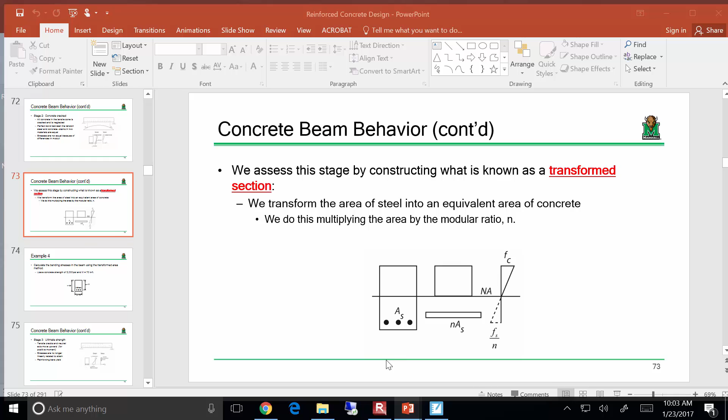So real quick, we've been talking about the concept of beam behavior. In other words, as we start to increase load, how does the beam respond?

All right, let's get back to this. So we started off talking about low levels of loading, and we broached the concept of a cracking moment. The idea that under low levels of load, the beam responds like any other, but because concrete is a material that behaves weakly in tension, there's a point when the concrete just gives up and the steel takes over, and that's the cracking moment.

Now, I think maybe there was a little bit of confusion about, well, if the concrete cracks, how does it grip onto the rebar? Well, hopefully I've got a little video here that might help explain what's going on.

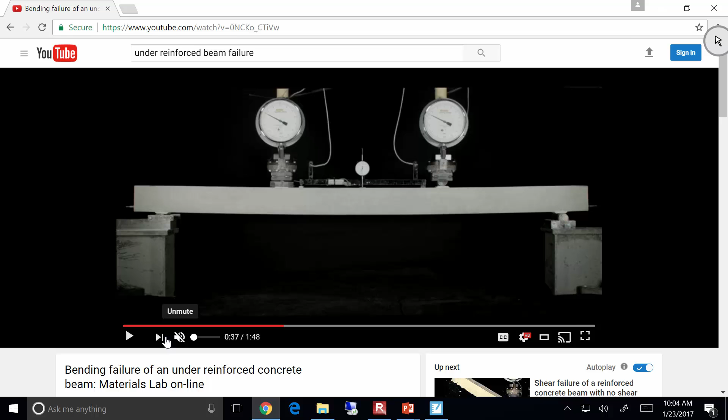So I've got here a reinforced concrete beam test. Now, you'll notice the video states that this is a bending failure right there. On the video, the title lists the bending failure of an under-reinforced beam. That might not make a lot of sense right now, but it will later, because there are differences in the ratio of reinforcement that can go in concrete beams, and there's a very big difference between the failure of what we'll call an under-reinforced beam and an over-reinforced beam.

We'll get into that later when we start broaching topics of design. But I want to be clear what happens during the bending process. Now, I've got this beam and I'm applying load, and you can see the dials are cranking up, and you can see the loading is applied.

Now let's be clear. At this point, we've already broached the cracking moment because it might be a little hard to see, but you can see the cracks are forming, right here and here. We've already hit the cracking moment because it's cracked.

That doesn't mean the beam can stop taking load. That just means the steel starts to take over. Our bending cracking is occurring right here, but there's still concrete over here that's gripping onto the rebar and it's doing just fine. So the steel can take over because the rest of the beam is still gripping that rebar, which brings up another topic we'll talk about later: the concept of development length. It's the idea of how far a particular piece of rebar needs to be embedded into concrete in order to develop its full capacity. That's a whole can of worms we'll talk about later.

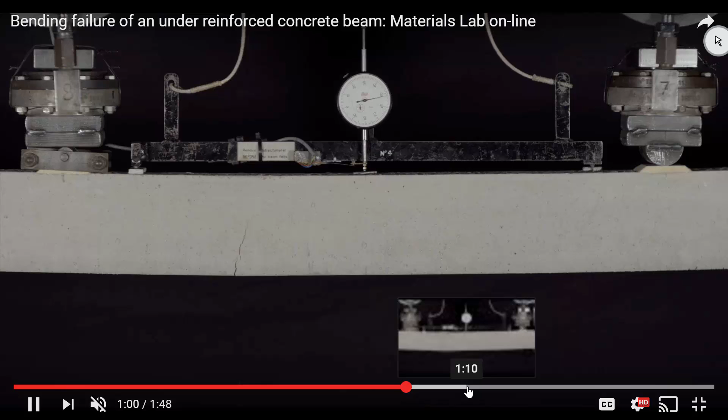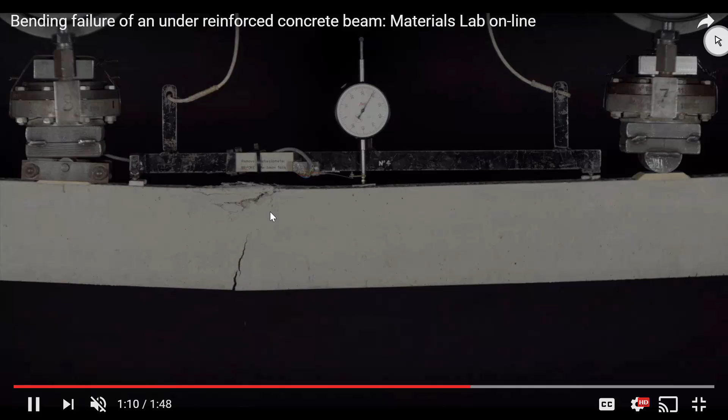But does this kind of make sense? Keep in mind, the beam has undergone its cracking moment, but you can see it's still accepting load. Now you can see it's starting to give up and it's kind of softening. You can see it reached its nominal capacity. This is them zooming in on it a little bit, and you can see cracks are forming, and it's still accepting load. You can see there it goes, and then when you start to reach the compressive crushing stresses right here, that's when the beam basically kind of gives up. When the concrete in compression gives up, it's done.

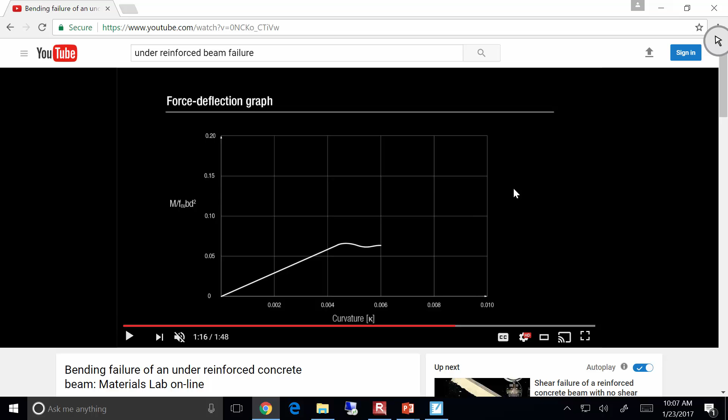So far, so good? Any questions? All right, now just because I like showing these videos...

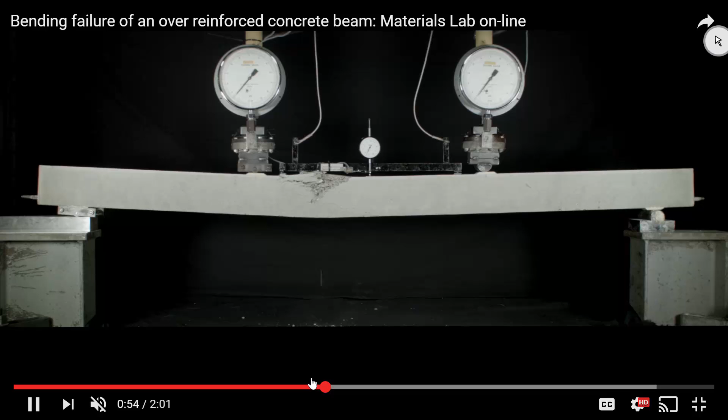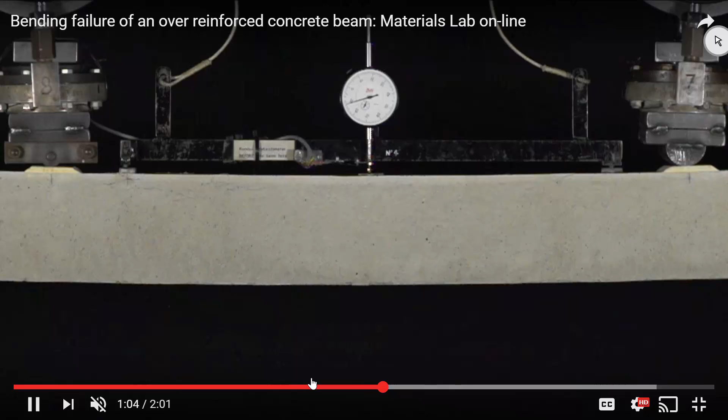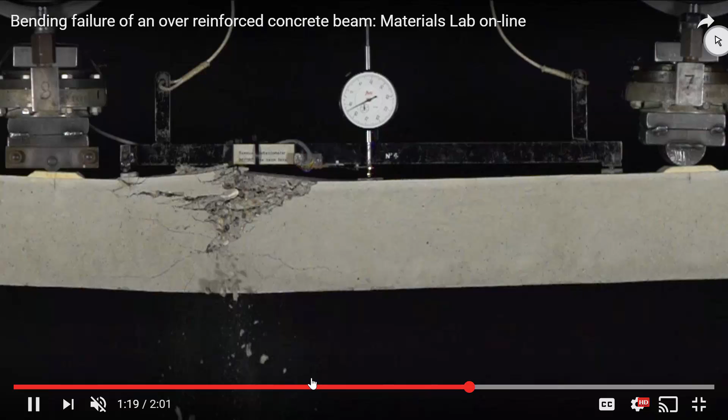This is an over-reinforced beam, and you'll notice the behavior is quite different. The difference is this is a concrete beam as usual, only instead we threw more rebar into it. And when you throw more rebar, you'd think that'd be safer. Not necessarily, because we have to obey this thing called equilibrium, and equilibrium states that the compression has to equal the tension. So if you throw a bunch of rebar into it, you're demanding more compression from the concrete all at once, so when it goes, it goes quick. So that's an over-reinforced failure. So sometimes throwing a whole bunch of rebar into it is not necessarily the right answer. It's just something to think about for later.

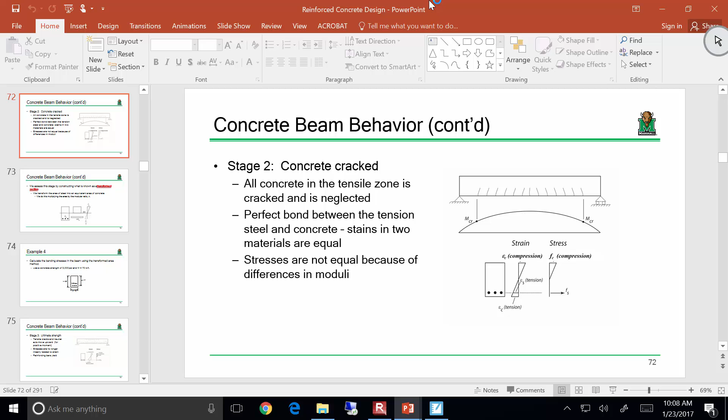Let me say that. Okay, you're raising a good point. So in the world of beam behavior, we have three regions that we define.

We have regions that are tension controlled, meaning it's largely governed by its behavior in tension. We have compression controlled regions, and then we have a transition region. When we're in beam design, we want our beams to be tension controlled. In other words, we want the steel to yield before the concrete crushes, because in that instance we have presence of large deformations, and we get a little bit of quote-unquote warning that the beam is going to fail. If it's governed by compression-controlled behavior, when it goes, it goes quick, and that's something we don't want to happen. So does that make sense? But to succinctly respond to your question, what I would say is just right is under-reinforced. That's just right. Does that make sense? We'll get into this later.

Yes, sir? Are you talking about like fiber reinforced mix or fiber reinforced bars?

Yeah, I mean, there are other grades of concrete. I do a fair amount of research with a material called ultra high performance concrete, and it's basically a particular type of mix where essentially steel fibers are thrown into the mix, and you can get some compressive stresses that are like 20,000 psi easy. The problem is it's expensive, so you can only use it in appropriate details. But yeah, they do that, and it's just going to change your FC prime, and it may change your behavior a little bit. But once you start getting into that, you start getting into more advanced topics in concrete design, and right now I'm just trying to focus on basic stuff. So I want you to be able to handle normal, regular old concrete before you can handle all the fancy stuff. So, sound good? Okay.

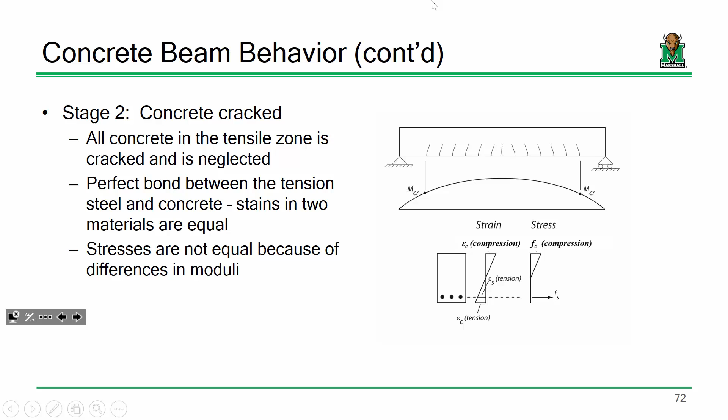So let's say that the beam has cracked. Let's say we have broached the cracking moment. So that means essentially the steel is starting to take over. Now, in our analysis, what we do to be conservative is we say that any concrete that's in tension, we just assume that concrete to be ineffective.

So if we samurai sword or lightsaber through the cross-section, we end up getting something that looks about like this. Let me draw this over here on the side.

So we have the neutral axis right here. We have the concrete above that's in compression.

And in tension, all we have is the rebar. I'm not saying there's not concrete there, I'm just saying we're assuming it to be ineffective. It's not really doing us any good. So if you want, you can think, yeah, there's a beam down there, but we're just not considering it.

Now here's the problem with that. The problem is that I now have a cross-section that's got two materials in it. So if I samurai sword through the beam, I've got part of it made out of concrete and part of it made out of steel.

The problem with that is if I start breaking out mechanics of materials or deformable bodies, if I start breaking out sigma equals My over I, the problem is that sigma equals My over I becomes invalid when you have a beam that's made of multiple materials.

It doesn't work. Sigma equals My over I assumes that your beam is made out of wood or aluminum or copper, not out of concrete and steel. It doesn't work. So what we're going to do is this.

We're going to, quote unquote, transform this lump of steel into an equivalent lump of concrete. So our cross-section is really going to look like this.

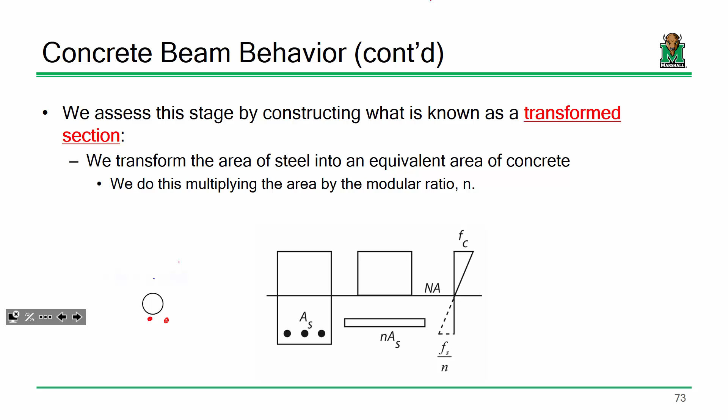If that's the case, then I want to go into the following example, okay? Now, I want to calculate the bending stresses in this beam using the transformed area method. So we're going to assume that this beam is being subjected to a bending moment of 70 foot kips.

We're using a concrete strength of 3,000 psi. I want to determine the stresses.

Now, a couple things I'll point out. I'm being very choosy when I use my symbols. For instance, B, I'm saying, is the width of the beam. Okay, D — now this is a D, we're going to use D quite a bit throughout this semester, so this is something you'll want to pay attention to.

Notice how D is the distance from the top of the beam down to the center of the rebar. It's not the height of the beam. It's the depth from the top to the rebar.

By and large, when we do our design calcs later on, we're not going to really care that the beam is 20 inches tall. We're going to care more about the distance from the top of the beam to the rebar. That's going to matter more to us than the height. But we'll get into that later. So far, so good? Okay.

Now, we do need the height, however, to determine the gross moment of inertia, because what I want to know is this: we're calculating the bending stresses using the transformed area method, or transformed section method — it's the same thing. That assumes that the beam has already cracked.

So I want to see what is the cracking moment of this beam, and have we already reached it. So let's just sort of play around with that and see what we get.

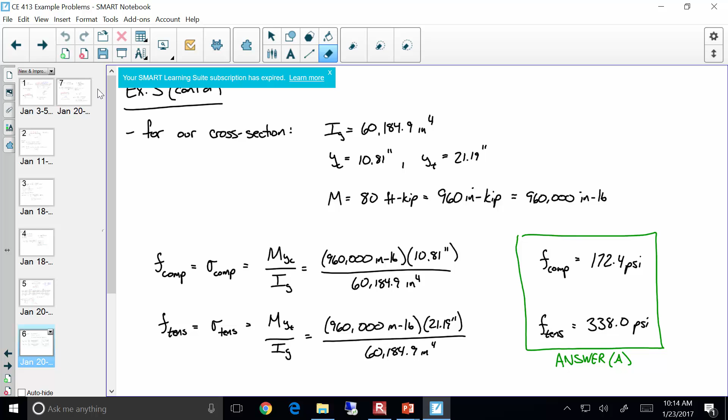Okay, all right, so let's play around with this. Let's see what we got going on. Okay, so let's start off by determining the cracking moment.

Now, by now, you should have enough experience with the examples that we've done to determine this. So let's do this: to determine the cracking moment, we're going to need some values. Somebody start spitting out some values, and let's see how we discuss them. So what's a value we're going to need to determine cracking moment?

The modulus of rupture, F sub r. So how do we compute F sub r?

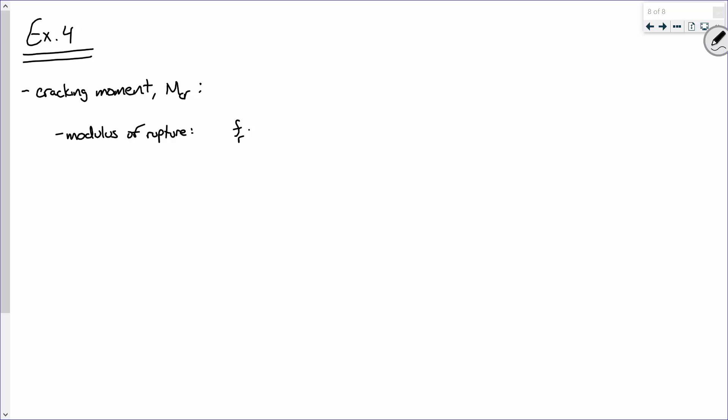So F sub r equals 7.5 lambda square root of F C prime. Okay, let's start plugging in some values.

We'll assume this is normal weight concrete, so what's lambda? 1. And what do we do for FC prime? Square root of what? There we go, 3,000 psi. We plug in psi, we get out psi. So what is that?

When you see a square root of FC prime, that's a good question. Put in psi and you get out psi. If you put in ksi, you could say you'll get out ksi, but I'm telling you the answer will be wrong. And you could test that.

Well, we could test that here. First off, give me this. What do we have here? 410.8 psi. Okay, so do this: 3,000 psi equals how many ksi? 3. So do 7.5 times the square root of 3 and tell me what you get. You don't get 0.4108, right?

Okay, so yeah, always put in psi and get out psi. That's a good question, and unfortunately, it's very easy to test. So, sound good? All right, what else are we going to need to compute the cracking moment?

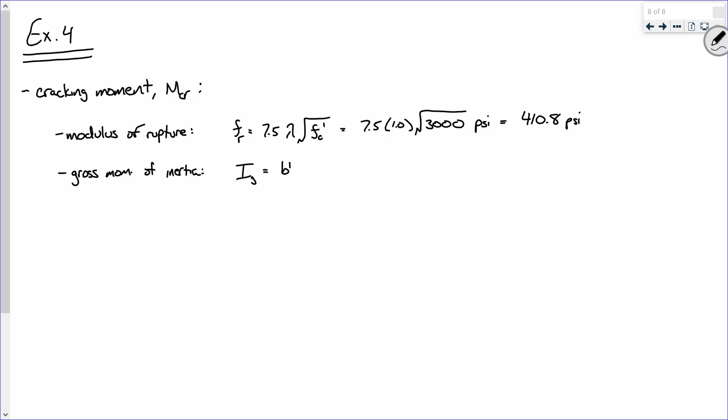Moment of inertia, or gross moment of inertia. So how do we compute the gross moment of inertia? The b h cubed over 12. So what is that? Tell me what to do. What's b? And what's h?

For now, we're looking at the whole beam as if it was one cohesive material, so we'll use 20. I'm saying later on, like in a few weeks, the h isn't really going to matter to us. Right now, for this calc, it does. So what is this? Say it again. 8,000. 8,000 what? There we go, inches to the 4th.

We're also going to need y sub t. That's the distance from the centroid to the extreme tensile fiber. Remember, either the very top, or in this case, because we're looking at tension, the very bottom of the section. So how far is it from the centroid to the very bottom? 10 inches, right?

All right, sound good? Okay, so if I've got all this, how do I compute the cracking moment? What do I do? Plug and chug. And what's the formula?

There you go. So therefore, cracking moment equals FR times IG over YT. So what's that come out to be? It'll be a pretty big number, and that's fine.

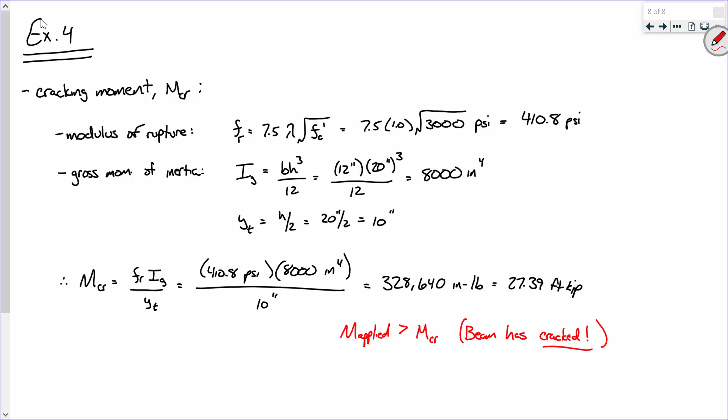Okay, so in order to handle this, we're going to need some values, a couple things. So we need to do a transformed section analysis. We're going to need a few values. I'm going to walk you all through this. So the first thing we're going to need is a modular ratio.

Now a modular ratio, the denotation for that is a little n. Okay? Now to calculate the modular ratio, we're going to need two things: the modulus of elasticity of steel, E sub s, and the modulus of elasticity of concrete.

Now first off, the modulus of elasticity of steel is a constant. Remember what that is? 29,000 what? KSI. Okay, so if it's hard to remember what E sub s is, you could put E sub steel. That helps. And that's 29,000 KSI.

Now, that's for steel. What about for concrete? For concrete, we're going to have to compute that. So you all are going to have to dig back through your notes. It's in there somewhere. Tell me, how do we compute the modulus of elasticity of concrete? It's in there. Make you all do some research, going back through your notes. It's like I'm trying to get you all to learn something. It's crazy, I know.

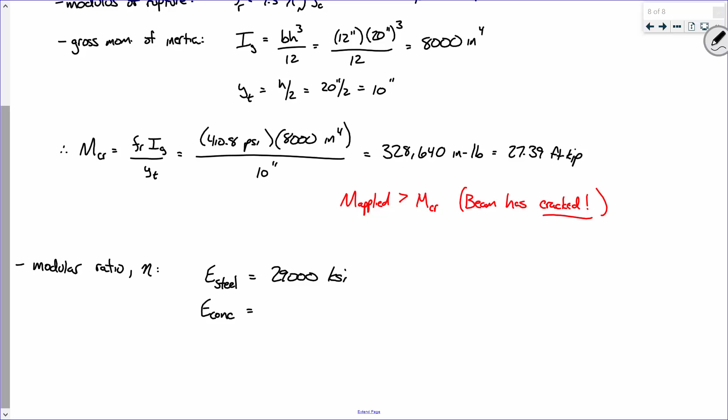There we go, 57,000. Does everybody see that? So 57,000 times the square root of f'c prime. For most cases, that's going to be good enough for government work. So 57,000 times the square root of f'c prime.

Okay, tell me what to do. What do I plug in? You plug in the f'c prime. And what is the f'c prime? There we go. This is my point: 3,000.

57,000 times the square root of 3,000. Now what units is that going to give me? PSI, there we go. So plug that in and tell me what you get. 3,122,000. 3,122,000 what? PSI. Okay, now that's PSI.

What's the problem with that? It needs to be KSI. So how do I do that? Take 1,000 off of it. So if I want, I could say 3122.02. That's good enough. Actually, you could probably just do 3122 and that'd be fine.

Sound good? To calculate the modular ratio, we're going to take E steel divided by E concrete. So 29,000 KSI over 3122.02 KSI. The decimals really aren't going to matter.

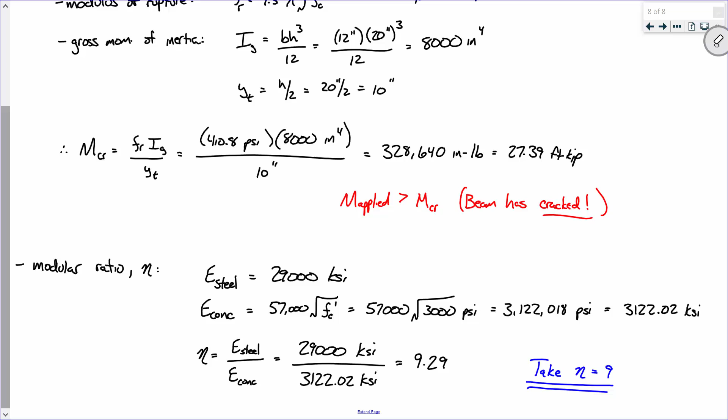Hope you all remember how to solve quadratic equations. It's on the Casio. Oh, it's there. Hit mode, number 5, and then number 3.

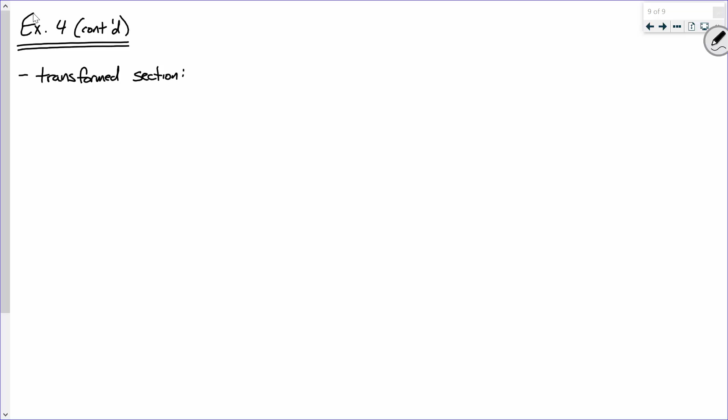Okay, transformed section. So we've got an n value of 9, and we also are going to need the area of steel. Now tell me a little bit about the steel in this section. What reinforcement are we using? Three number 9s, right? So going back into your notes, what's the area of one number 9?

No, I know you're thinking that you always take the value and divide it by 8, but that only works up until a number 8 bar. Number 9s are unique: 1 square inch.

Now what slide are you finding that on? 63. If you go to slide 63, you'll see the areas of conventional bars. Remember, I told y'all that's one you really need to put a bunch of stars on. The area of a single number 9 is 1 square inch.

So 3 number 9s, that's 3 square inches, and I'll label it 3 number 9s. I know you're thinking it would just be 9/8, where the convention is to divide by 8, but that only works from a number 3 to a number 8. So if it's a number 5, it'd be 5 over 8 — but that's just the diameter, not the area. To calculate the area, you'd have to use pi over 4 times d squared.

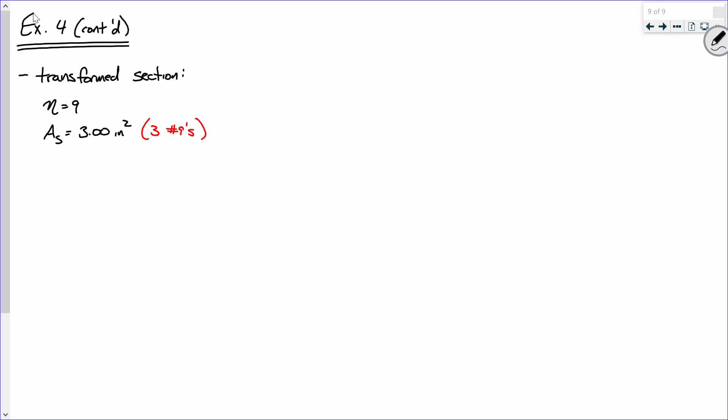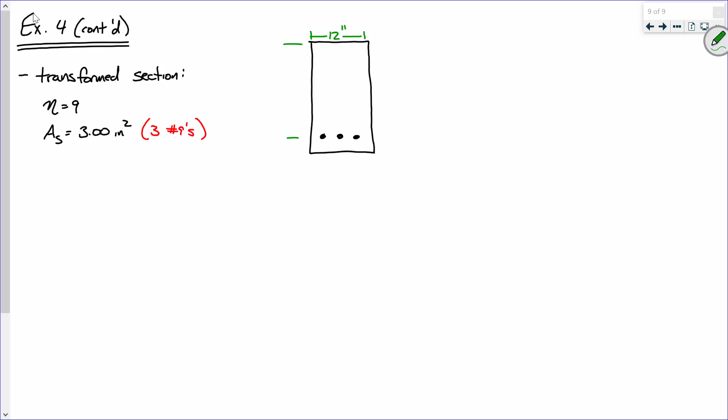Sound good? Okay, now here's what's going on in our cross section. So we have a beam that looks something like this. This is 12 inches, and we have 3 number 9s. And this is 17 inches. Is that right?

Okay, now for a transformed section analysis, what we're going to do is this: remember, we assume that all the concrete above the neutral axis is effective, but everything below isn't. So this is still 12 inches.

But this distance right here, we don't know what that is, okay? Because the point is to try and figure that out. So because we don't know what it is, I'm going to use the basic mathematics convention and call that x. I don't know what that is, we're going to try and figure it out.

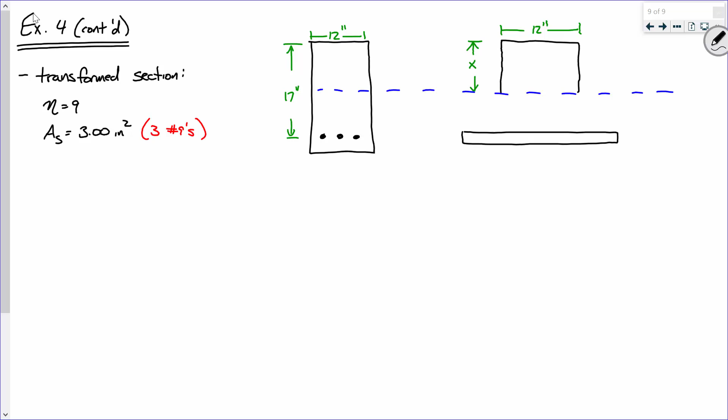Now down here, we're going to have this sort of lump of concrete right here, and that lump of concrete is going to kind of replicate what's going on with this steel. So this steel has some area, some 3 square inches. I propose that we have 3 square inches of steel, to develop that same amount of stress with concrete we're going to need a whole lot more concrete. Does that make sense? Concrete's a weaker material, so we're going to need more of it.

So I propose that the size of this lump is going to be nAs, which is going to be 27 square inches. That make sense? Everybody okay with that? Now let's get some dimensions taken care of.

Now the dimension from here to here, this is still 17 inches. We're still putting that effective lump of concrete where it needs to go, to simulate the effect of the steel. Okay, what I need to know is this.

Somebody tell me what is that dimension right there. Say it again. There you go: 17 minus x. Now, is everybody okay with that?

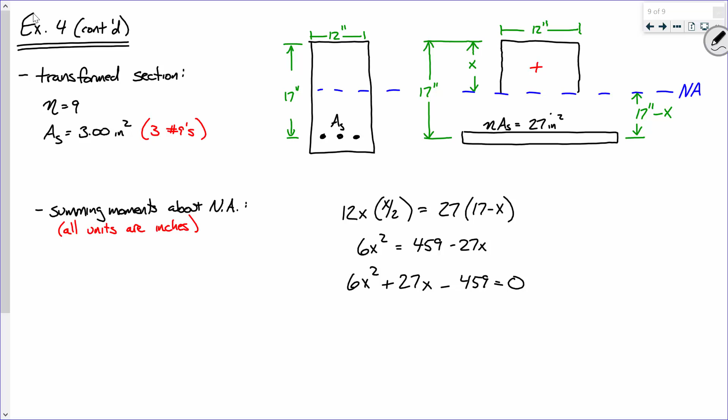Remember, it's mode 5, 3, and then you can just enter in your constants, and we should get two answers. 6.78 - we'll keep it to 3, we'll say 6.781. Is that right? Okay. And x sub 2 is what? -11.281. Okay, everybody getting that?

Now, which answer doesn't make any sense? The negative, right? We're talking about a distance, a distance measured down from the top of the beam. That negative obviously doesn't make any sense. And you'll either get one of two responses: you'll either get a negative answer, or you'll get some answer that's like 30 or something, that's greater than the depth of the whole beam. That doesn't really make any sense either. So that tends to happen on a lot of the calculations we perform, that you'll get two roots, and one of them just by observation ain't going to make any sense.

Okay, sound good? If you've got this, then you can go ahead and determine your transformed moment of inertia. And this is actually a pretty straightforward computation, very similar to what we did before with that T-beam. We're going to draw a similar table. So we'll say shape, and go to work. Although the nice thing about this calculation is, remember how we had like an A, and a Y, and AY, etc., and we had all of that?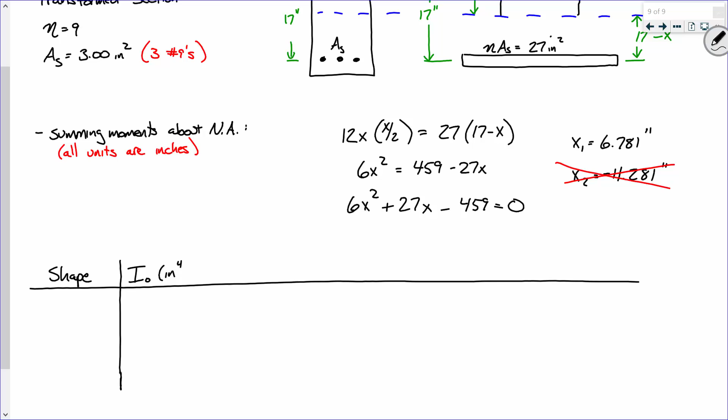We did the A and the Y and all that because we needed to determine where the centroid is. We don't need to determine where the centroid is because we know where it is. The centroid is 6.781 inches from the top. So our transformed section analysis is a lot easier. We're going to start off by calculating the moment of inertia, that's going to be pretty simple. Now for this cross section we've got two shapes, right, we've got the concrete and we got the steel. So let's start off with the concrete.

Okay, now this region of concrete above the neutral axis is a rectangle. So help me out, how do you compute the moment of inertia of a rectangle? BH cubed over 12. So I propose that to compute that for this particular rectangle, it's going to be

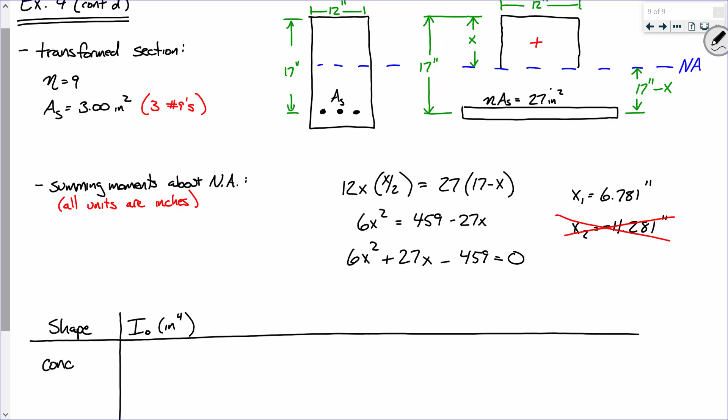12 times 6.781 cubed over 12, and that's going to equal what? Yes, that is correct. Say it again. 45.98. I got something a little different. 311.80. 0.8. Was it 0.83?

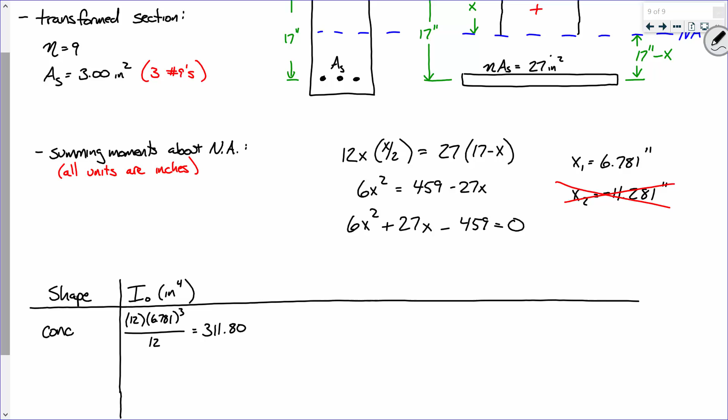I'm kidding. All right, I'm going to work on just the concrete, and then we'll go back to the steel. So here's the moment of inertia of the concrete.

Now we're going to need a couple things. We're going to need the area. How are we going to compute the area of that concrete region? Just 12 times 6.781, right? So 12 times 6.781, and that's what? 81.37. Okay.

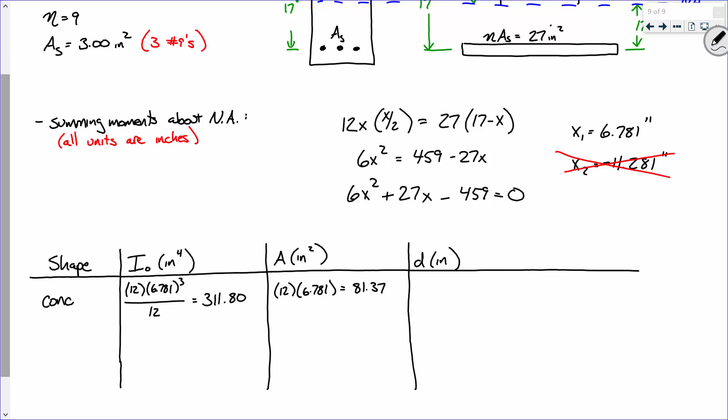Now, that's the moment of inertia. We got the area. We also need the distance for I plus AD squared. Now, the distance is how far it is from the neutral axis to the center of that rectangle. So how do we find that out? How do we go from the neutral axis to the center of that rectangle? There we go, 6.781 over 2. Now what's that? 3.39.

Sound good? So that's I plus AD squared. So tell me what you get for that first row. 12.36, you said? 1246.91, so 1246.9, something like that. We'll just keep it like that. Okay. Everybody okay with this? Now, that's the concrete.

Now let's look at the steel. Okay, now here's what might be a little strange. But what we're going to do is this. How would you compute, let's just conduct this as a thought experiment, how would you compute the moment of inertia of the steel? Looks like a rectangle, right? So BH cubed over 12, right? But how tall is it? Say again, you're right when you say that, not very.

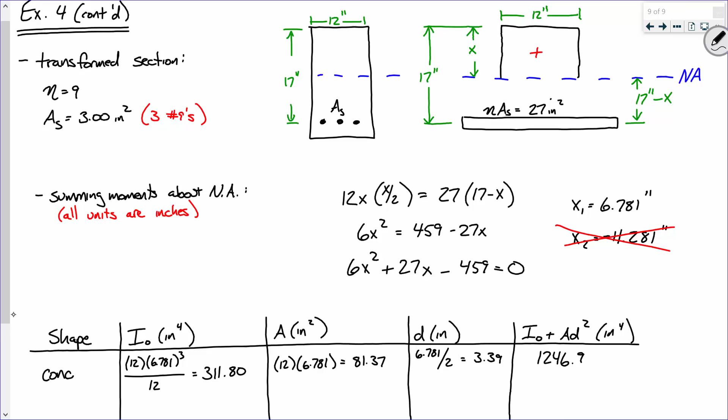What we're doing when we assume that, I used the word lump of concrete. That word was actually chosen very carefully. I'm essentially just lumping all of that area at one particular point, okay? So what I'm basically assuming is that I have an area, 27 square inch area, but it really doesn't have a height. It's just a lumped value right there. So what I'm getting at is that the moment of inertia, the individual contribution, or the I sub O for that given value, I'm just going to take that to be 0, okay? Because it's just a lumped value right at that point.

But you might be wondering, well, how does it contribute to the section? Well, it's not the I sub naught, it's the AD squared. What is the area of that steel going to be? 27. So it's going to be 3 times 9, which is 27.

Now, how far is it from the neutral axis to the steel? Say it again. 10.219 or 10.22. And you found that by saying 17 minus 6.781. And so that came out to be, just for purposes of calculation, 10.22.

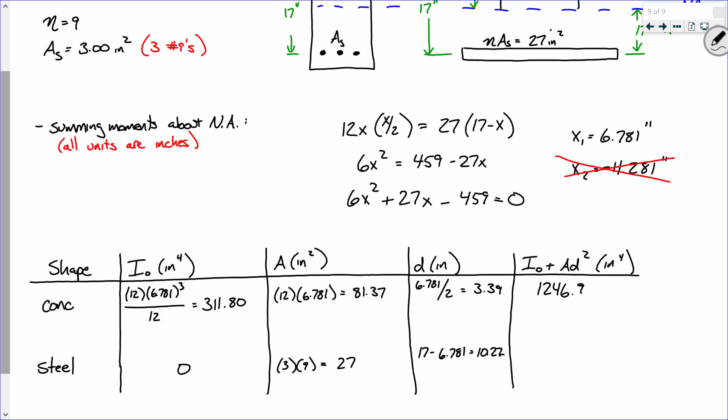Make sense? Now, tell me what I plus AD squared is. 2819.5? I'm easy to get along with, we'll just say it was the first one. Do I get a second on that? Okay, so sum those values up, and what do you get? Everybody get that?

Everybody good? So here's what I propose. I propose that the moment of inertia of the transformed section is 4066.4 inches to the fourth. Okay? Now let's talk about that value.

Does this value make sense? Think about it like this. What was the gross moment of inertia? 8,000. Okay? So let's think about what we're talking about here. We're talking about a beam that's already cracked, right? We're asking ourselves, how strong is this beam after it's cracked?

Now I propose that the moment of inertia is a measure of how stiff a section is under bending. Okay, that's what it is. That's why we use sigma equals My over I. Before the cracking moment, we had a moment of inertia of 8,000. After cracking, we have a moment of inertia of 4,066.4. Does that make sense? I think it's cracked, so now the beam got weaker. It didn't completely fail because the steel took over, but it is flexurally less stiff. All right? Does that make sense? Everybody okay with that? Okay.

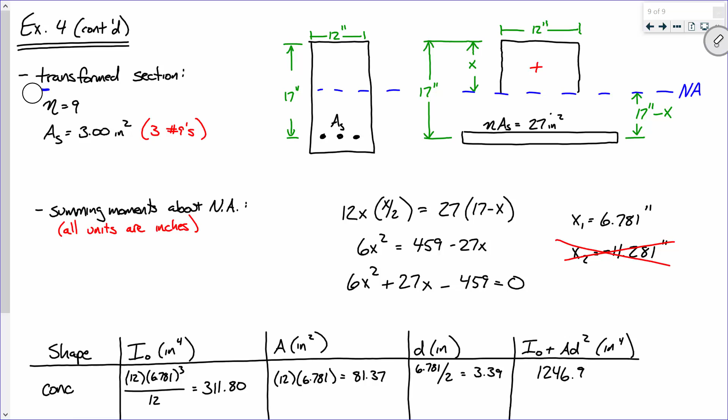All right, what is TR subscript? Transform, just this part right here. Transform. Sometimes it's referred to as I sub CR, just the cracked moment of inertia after it's cracked. So either one's fine. All right, sound good? Okay, now.

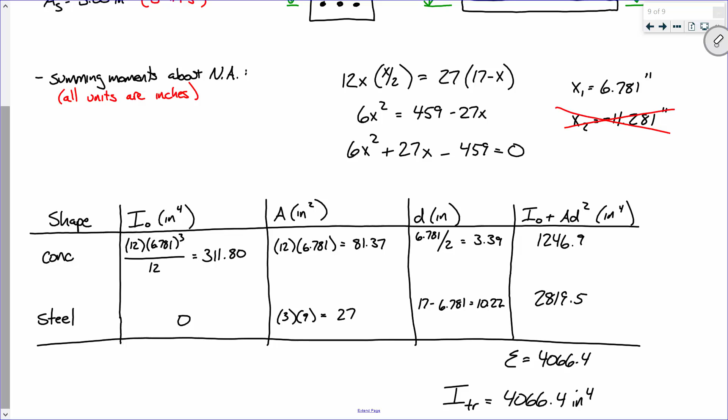Okay, the question, though, is we still need to compute our bending stresses. This is example 4. Okay, so we still need to compute our bending stresses. So let's look at this.

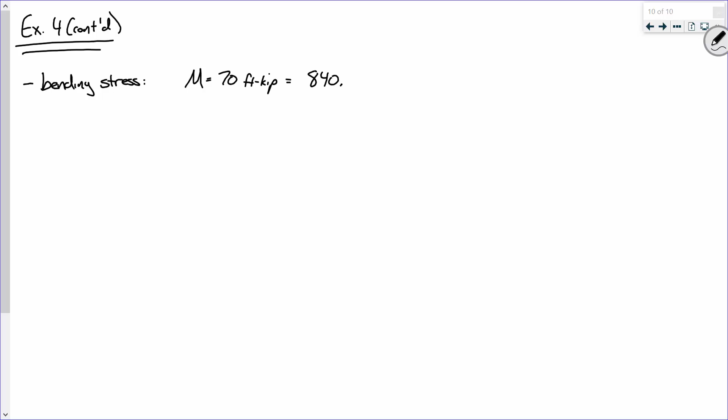So we have a moment of 70 foot-kips. Now, just for the heck of it, I'm going to have all my stresses reported in PSI terms. So how do I get this to inch-pounds? What was my little shortcut? Multiply by 12,000. So if I multiply by 12,000, that's 840,000 inch-pounds. Sound good?

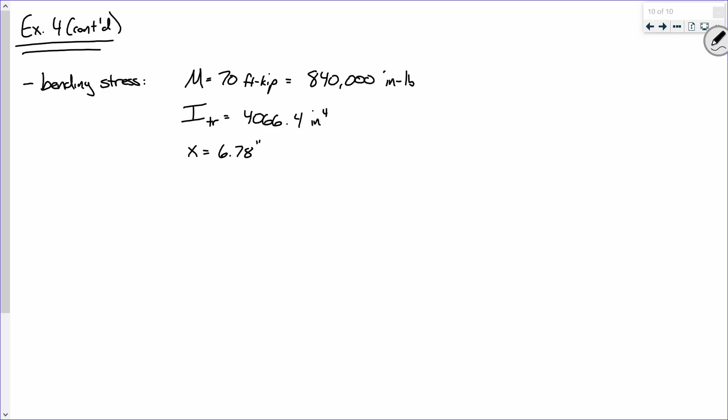Now we have a moment of inertia of 4,066.4 inches to the fourth. And we had an x value, I'm just going to keep it simple. It was 6.78. So we've got our beam that looks like this. We've got our lumped concrete. This is x, and this is 17 minus x. Make sense?

Okay, now let's start off with the compression region. So the compression region, we need sigma equals My over I. Remember, the y is the distance from the neutral axis to the way, way tippy top of the beam. So how far is it for compression from the neutral axis to the top? The x, yeah, 6.78. So the compressive stress,

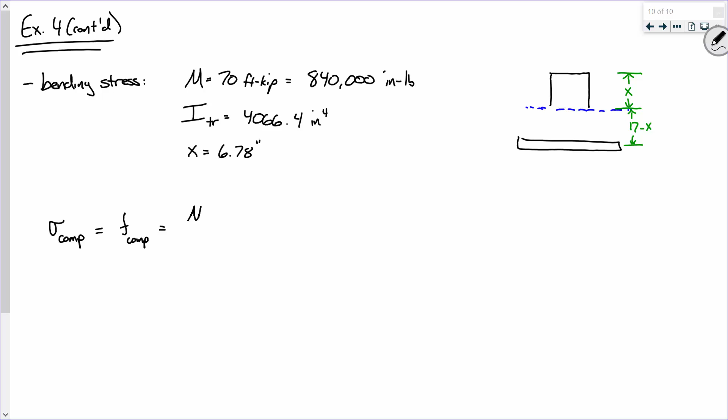Now for tension, we do the same thing, okay? We say My over I. Now what's our y going to be for the tensile region? 17 minus x. But here's the thing: if I were to just compute this directly, I would be reporting the stresses still assuming that it's a lump of concrete. But it's not, it's a lump of steel, okay? So I'm going to take those stresses and adjust them by n, okay? Because in actuality, the actual area is much smaller. So if you think stress equals P over A, the actual area is much smaller, so the stresses are going to go up. That's why we multiply by 9.

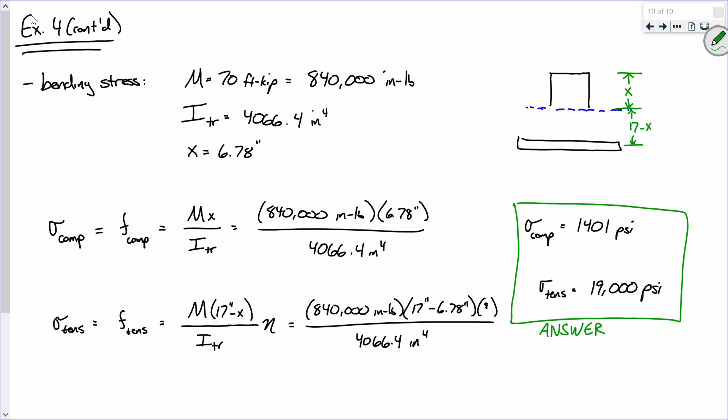Okay, now a couple things. Look at these values. These stresses are much larger than the stresses that we saw before, right? But they should still be well within what the materials can handle, right? What was the compressive strength of the concrete we used in this example? 3,000 psi, and that's 1,401. So we're getting there, but we're still not there. And steel, heck, steel usually goes for rebar for 60,000 psi. So we still got a ways to go. This isn't ultimate capacity, okay? Ultimate capacity does take a little bit of discussion.

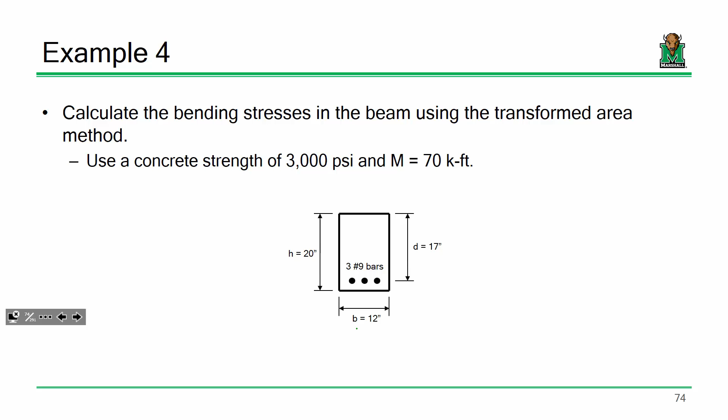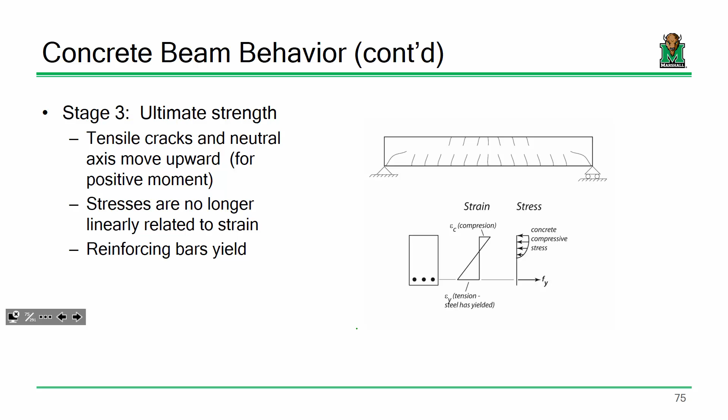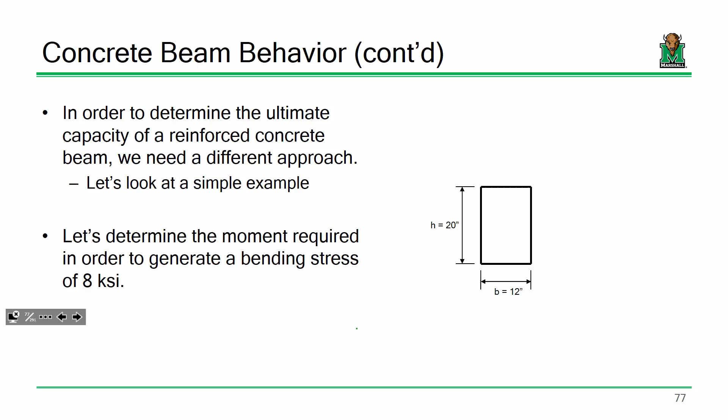Now, the complicated part regarding ultimate capacity is that your bending stress profile is not linear. It's nonlinear because your concrete is a nonlinear material. To explain that on Friday, I'm going to break out the C word, a little bit of calculus. I know, calculus is the real secret. But ultimately, let me back up. The long and short of it is this: the calculus we're going to use is merely for explanation purposes. The point is to try and come up with a way of assessing ultimate capacity without using calculus. So I'm going to show it to you once so we never have to look at it again. Is that okay? Well, you'll have to deal with it.